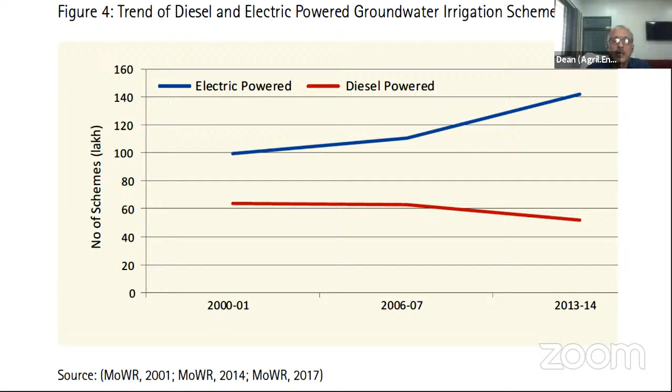Now, electricity. There are two sorts of power used in agriculture: electric pumps and diesel operated pumps. Over the past 2 decades, there's a drastic increase in electric power pumps over diesel power pumps. The reason is the deepening of the water table.

Roughly 15.6 million electricity pumps are being operated, 8 million diesel pumps, and 0.3 million from other sources. The electrification of pumps is being reflected here, and 21 million agriculture pumps are connected to the grid power, consuming roughly 18.5% to 20% of the energy.

5 lakh pumps are being added annually, and consumption has risen 54% since 2015.

Local irrigation systems are highly inefficient and unreliable, causing water wastage and consuming higher energy per unit delivery. Diesel consumption is roughly 200 million liters per year, causing $2 billion burden on the exchequer.

The growth of electricity, particularly in agriculture, is 25-fold. The demand has tremendously increased, which you can see reflected here.

In 2006, pending applications showed the demand growing every day for electricity pumps. In 2016-17, particularly in Gujarat, 1.61 lakh applications from 33 districts sought agricultural pump sets, out of which 1.32 lakh are pending.

Regarding electricity tariffs, the government is not even recovering 10 to 12% of the cost of supply, because electricity charged for urban areas is 6 rupees, but for agriculture it costs only 60 paisa per unit.

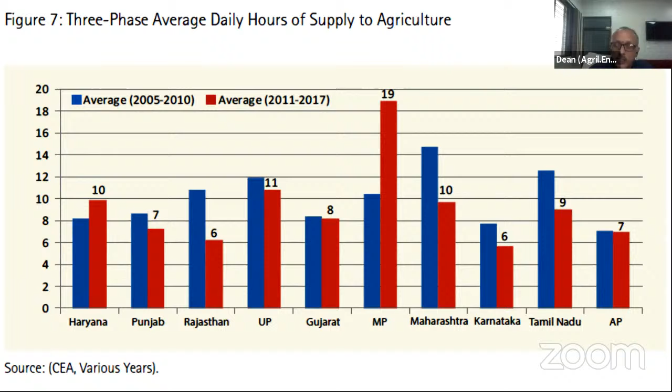Regarding three-phase supply, the assured Gujarat supply launched under Jyotigram in 2003 gives three-phase electricity of 8 hours. Otherwise, where Jyotigram is not available, we get less than 8 hours, even less than 6 hours. The availability of three-phase power across different states is reflected here.

The efficiency of the pumps is 40%, and the transmission losses are 25%. Cost of electricity is 60 paisa per unit. This is causing the water table to deepen very high, and overexploitation is causing too much deepening of the water table, particularly in North Gujarat as well as

the Kathiawad region. Because of this overexploitation, even the Central Groundwater Board has categorized Gujarat into 25 blocks, out of which 23 are overexploited in the state, with the worst affected being North Gujarat, where depletion is more than 100%, meaning extraction is more than the replenishment it is gathering. Against the national average extraction of 62%, Gujarat is using 72% of the extraction percentage.

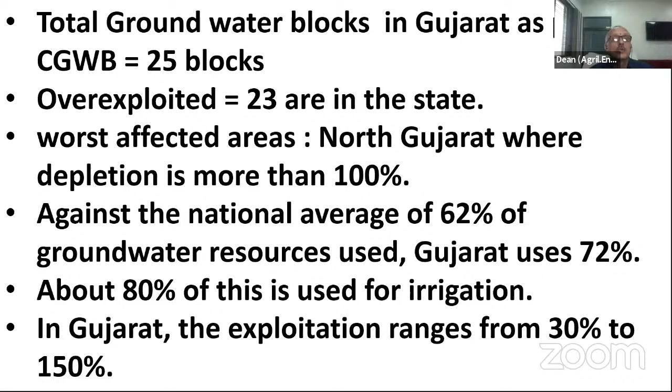Out of this, 80% is used for irrigation, and the exploitation ranges from 30% in South Gujarat to 150% in North Gujarat. This is causing too much scarcity, particularly in the groundwater blocks, and we are going to face an acute shortage by 2025. So the electricity-groundwater nexus needs to be analyzed, and rethinking is needed in this region.

On the energy sector side, totally 150 kilo cubic meters of groundwater is being extracted with electric pump sets, and 80 cubic kilometers of water is extracted from diesel pumps. The energy needed for 1,000 cubic meters to 1 meter height needs nearly 2.73 kilowatt hours of energy when friction losses are minimum and efficiency is at its peak.

For electric irrigation pumps, if you take efficiency at 40% and transmission losses at 25%, then for 1,000 cubic meters, roughly 9.1 kilowatt hours of energy is needed. That's the estimate the government is giving.

For 150 cubic meters of water through electricity, even if a 20 meter head is required, we are roughly consuming 27.3 billion kilowatt hours of energy. If you take a 40 meter head, it will be 55 billion kilowatt hours of energy needed. But in 2008, the Delhi Institute of Energy, in their raw data, estimated 87 billion kilowatt hours of energy, particularly for groundwater extraction.

But whether it's 40 meters or 20 meters, the value is too low, which is not reflected. That means there is a discrepancy. Either the water table must be deeper, or the transmission losses must be much higher, so the government is not reflecting it.

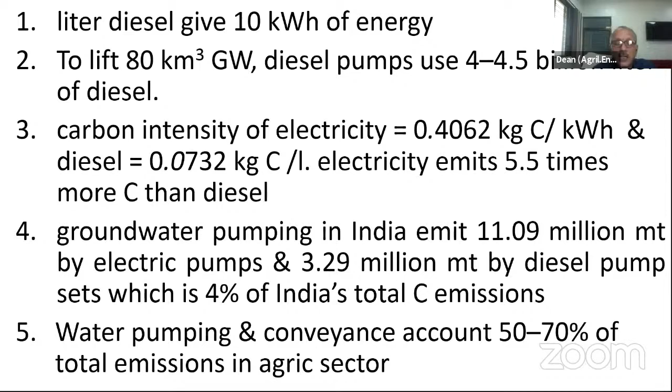Groundwater extraction is emitting roughly 11.09 million metric tons of carbon from electric pumps, and 3.29 million metric tons from diesel pumps, which means we are accruing roughly 4% of the total carbon emissions of the country. Even pumping and conveyance losses are causing 50 to 70% of the total emissions of the sector.

A second estimate suggests every meter decline of pumping water level will increase greenhouse gas emissions by 4.37 to 6%, meaning more carbon is emitted into the atmosphere. A 1% increase in diesel pumps reduces greenhouse gas emissions by 0.3%.

This is why diesel pumps cannot go beyond a certain level of the water table, and that's why we insist that where shallow water table conditions exist, diesel pumps are preferred. In eastern India, such as Bihar and UP, diesel pumps are more prevalent than in the western zone. Diesel consumption in agriculture is releasing 33.6 million tons of carbon equivalents into the atmosphere.

Now, regarding energy usage and demand, we have a population of 121 crores, out of which 83.3 crores live in rural areas and 37.7 crores in urban areas. The total installed capacity of the country was 370 gigawatts of energy produced as of April 2020, out of which thermal power constitutes 62.8% and hydropower constitutes 12.4%.

That means really 77% of total energy is catered from thermal as well as hydropower. And the 21 nuclear power plants established up to 2020 are producing 6780 million watts of energy. Per capita electricity consumption in India is 872.87 kilowatt hours during 2018-19, and peak power deficit in 2019 is 0.5%.

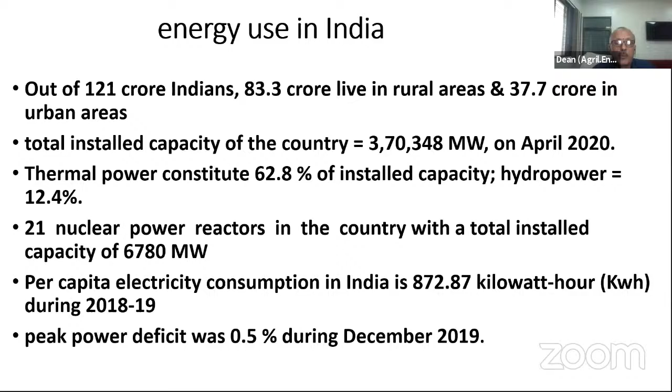Now let us see the Gujarat energy status in 2016 and 2018. Power demand is 18,221 megawatts. Energy requirement is 400 million units in 2018. Agriculture consumes 111 million units in poor rainfall conditions, or 60 to 70 million units in normal, good rainfall conditions. The government is purchasing 1500 to 2000 megawatts of energy from other states, and 1 lakh agriculture connections have been approved in the past 6 years.

So if you see, theoretical energy requirement is 0.34, but actual energy consumption is 0.98 kilowatt hours of energy per cubic meter of water, particularly in the Gujarat sector. Energy efficiency can be improved on two fronts: the power source and the appliances side.

Roughly 10 to 15% of energy efficiency can be increased by replacing existing undersized pumps with appropriate sized new ones, using low friction pipes, replacing high friction footvalves with low friction and low head footvalves, and through rectifications. These measures can save energy consumption by 440 kilowatt hours per year.

Now if you see it, existing pumps show a certain energy consumption in kilowatt hours per year compared to rectified pumps, substandard new pumps, and efficient new pumps. The electricity consumption over the year is reflected here. That's why we should go for efficient new pumps where low energy consumption is achieved.

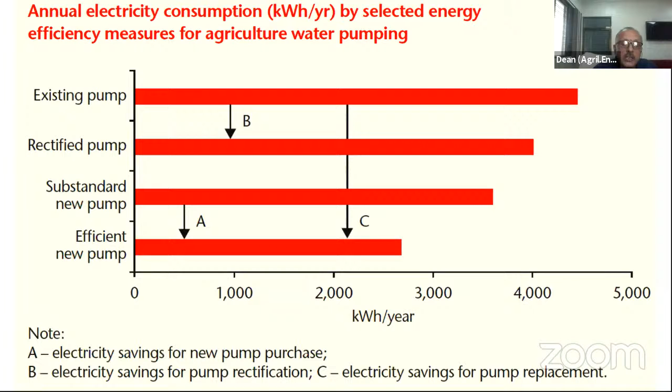In addition to that, if you provide renewable energy, it is going to save much more, and it's going to add another dimension to it.

Now on the agriculture pump side, if you see it, agriculture pumps should be replaced with smart pumps having a processing SIM card as well as smart meter systems. These smart metering systems can save 20 to 30% of the energy from pumping systems, and they can monitor consumption in real time.

Energy Efficiency Services Limited distributes Bureau of Energy Efficiency standard pumps. 2 lakh star-rated pumps are supposed to be given in Gujarat, and they need 54,000 crores for this program from the government.

30% of energy savings by 2019 is the target they have kept. This translates to annual savings of 20,000 crores on agriculture subsidies, or saving 50 billion units of energy per year because of these smart energy pumps.

Now if you see the rising demand, total demand is 183.8 gigawatts of energy, and expected peak demand in 2021-22 is 295 gigawatts. Because of the high standard of living, by 2035-36 we need 690 gigawatts of energy, particularly in India. That means the rising demand is there.

This is on the demand side. We need additional power of 450 gigawatts of energy by 2034. A 7% growth in energy supply is required if India grows at an 8% growth rate, and electricity will be the key input in the GDP growth of agriculture.

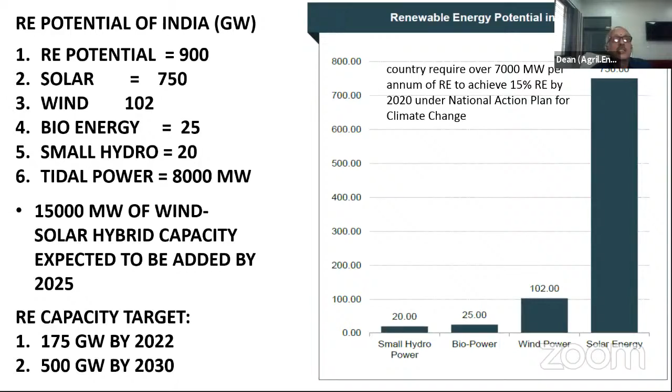Now, the rooftop system we are already adopting, and that will reduce 70 tons of carbon annually, and 78,000 kilowatt hours of energy can be saved.

And India, particularly in the solar energy sector, is going to replace 26 million groundwater pumps with solar pumps in the first phase. They are going to even replace, where access is not available, 2 lakh pumps connected with pipeline systems, which needs $1.6 billion in the next 5 years. Deployment of 20,000 solar pumps is planned in selected rural areas with access to pipe water.

This replacement of 5 million diesel pumps with solar can save 18.7 gigawatts of installed capacity and 23.4 billion megawatts of consumed grid electricity produced from 10 billion liters, resulting in carbon emission reduction by 26 million tons per year. Now, particularly wind power, the country is ranking 4th in installed capacity.

India is going to attain 227 gigawatts of renewable energy by 2022, against the target of 175 gigawatts in the Paris Agreement. They wanted to achieve 500 gigawatts by 2030, and solar installation increased by 360% by 2021.

As a percentage of renewable energy, it comprises roughly 49% of contribution towards power generation, increased from 12.92 in 2013-14 to 23.51 in March 2020. We are going to replace coal plants with renewable energy sources, saving 54,000 crores annually, and 5,000 compressed biogas plants will be set up across India by 2023.

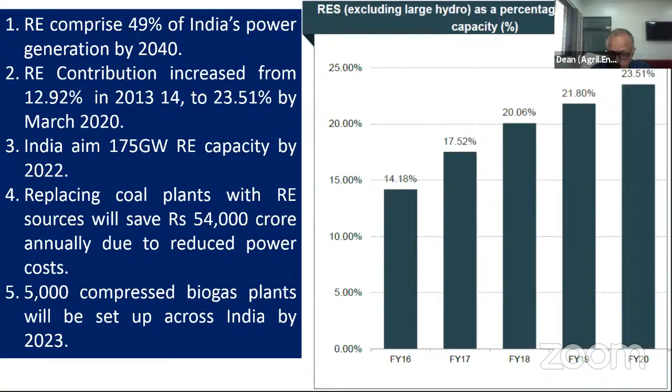That's the generation side. Now, installed renewable energy capacity growth rate is 17.33% from 2016 to 2021. Now, this is solar pumping coupled with irrigation systems.

The Surya Shakti Kisan Yojana, launched for doubling farmers' income, provides 12 hours of assured power supply during daytime for irrigation, covering 12,400 farmers from 13 districts of Gujarat, with a total project cost of 870 crores.

If you see, solar is really outperforming in India. Even wind power is reaching 114 gigawatts by 2022. In October 2019, India started a solar power plant in Rajasthan with a capacity of 2,225 megawatts of energy.

In June, Adani Green Energy got an 8 gigawatt solar energy project worth 45,000 crores. The Prime Minister has already inaugurated a 750 million watt solar power project in Rewa, MP. 47 solar parks with 25 gigawatts of capacity are going to be approved in India till March 2020.

The cost of producing solar power is 14% less than the cost of electricity generated from coal. Even on sprayers, we are using solar power, and with battery backup, the cost comes to only 25,000 rupees. A 30-liter tank can cover an area of 25 by 25 square meters with an application rate of 84 liters per hour.

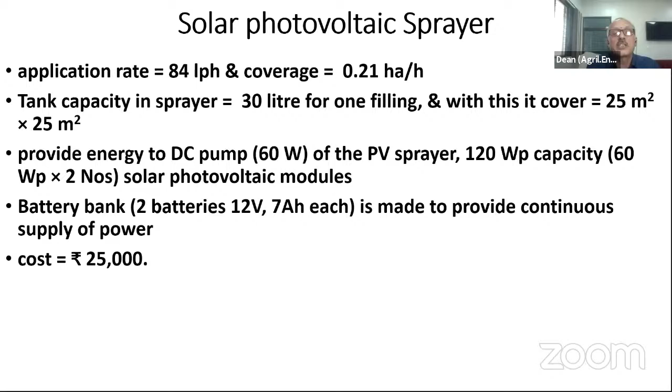Even dusters, which are being used with a field capacity of 0.075 hectares per hour, cost 9,000 rupees. Even solar dryers can save energy, particularly 290 to 300 kilowatt hours of energy per square meter area, with annual benefits of 6,000 rupees.

You can get return on investment within the payback period; the internal rate of return is 2 years. The drying time is half of solar sun drying, and it can reduce 1,127 kg of carbon created into the atmosphere per year. Your solar dried vegetables have much more affinity in the international market.

Some solar dryers and tunnel dryers are examples. And importantly, solar power tractors are coming. The cost of the solar power tractor is 2,35,000 per unit, with 1.5 kilowatt hours of energy and a 20 horsepower engine. In Rajkot, nearly 8 acres of land is already acquired, and they are going to produce these by 2019-20.

Saribhai Patel is there, and he is going to generate these solar power tractors, particularly in the market.

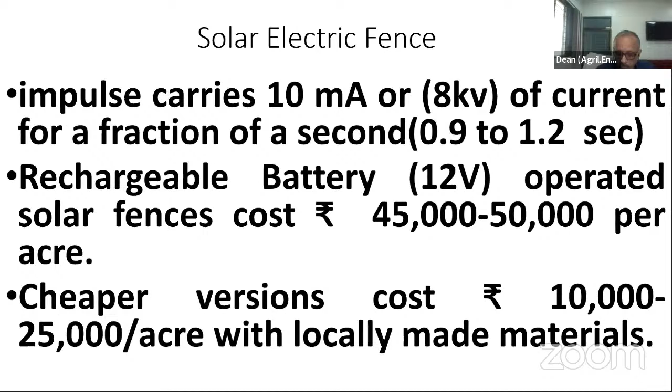Then solar electric fencing, which costs 45,000 to 50,000 per acre, gives electricity in pulses of 10 milliamperes for 0.9 to 1.2 seconds, which is sufficient. Even cheaper versions are available at 10,000 to 25,000 per acre with locally made available materials.

And you can get solar milking machines at a cost of 70,000, which are mobile machines. Even the Karnataka government is giving a subsidy of 50%.

Even Gujarat government is thinking on the same lines to extend the subsidy, particularly for milking machines with solar power operated systems. You can couple these mechanical machines with solar power, as mechanical systems already exist.

Wind energy installed in India is 37,744 megawatts up to March 2020, accounting for 23.5% of installed power capacity and 43.4% of renewable energy capacity. Out of the 175 gigawatts RE target, 60 gigawatts are to come from wind by 2022. Wind energy potential at 50-meter hub height is 49 gigawatts, at 80 meters 102 gigawatts, at 100 meters 302 gigawatts, and at 120 meters 695 gigawatts.

The cost of wind power comes to 3 rupees per kilowatt hour, lesser than coal. These are some wind potentials at 100-meter height, accumulating to 302 gigawatts particularly in India. Cumulative wind power installations keep increasing while cost keeps decreasing. The sector's contribution is about 10%, and about 2 million jobs are going to be created in the next decade for wind energy.

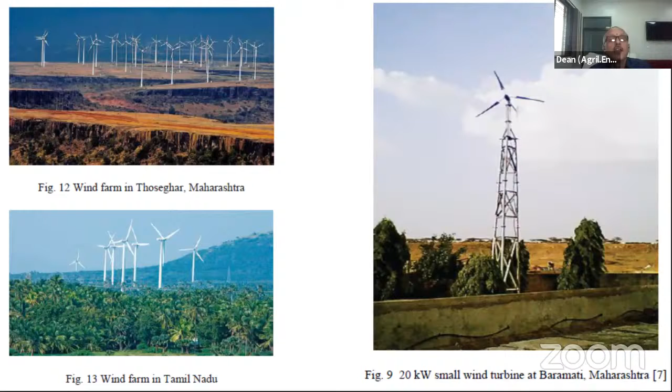Government of India launched the Fifth Wind Resource Assessment Program in 1985, and installed 50-meter towers, monitoring wind speed at 10, 20, 30, 40, up to 50 meters continuously from 1985. Totally 794 wind monitoring stations were established up to 2014.

Some wind farms exist particularly in Gujarat, where we have 1600 kilometers of area on the onshore, so a lot of potential exists. That's why Gujarat government has already initiated and installed 12 wind farms, particularly onshore.

Targets and reforms being taken: 22 gigawatts under implementation, 5 million jobs to be created in the next 20 years. Gujarat government is also taking up Land Reforms Act and evacuation policy for the government. They want to reduce carbon emissions by 15% from the renewable sector by 2020.

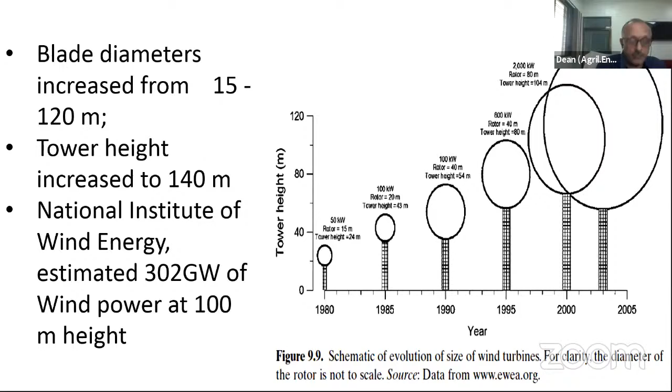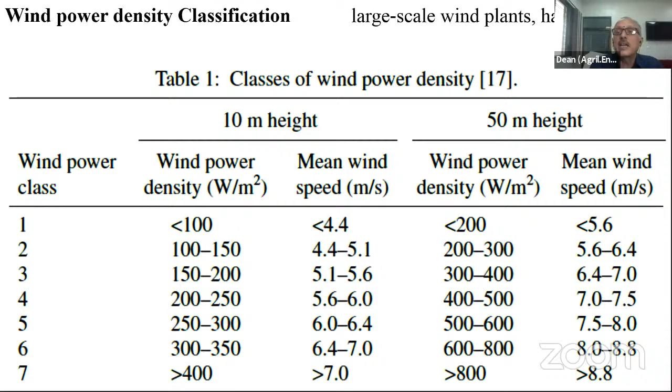Now if you see the wind power density classification, we have 7 classes at 10 meter height, 50 meter height, and up to 100 meter height - 10, 50, 80, 100, and 120. These are some of the heights which we give particularly for the wind power classes. If you consider large scale wind plants, they should have a rating of more than 4.

What should be the minimum wind speed required for optimum area? That is 3.6 meters per second. Economically viable speed is 5 meters per second. Acceptable is 10 meters per second. Optimum speed is 15 meters per second. But the output power is directly proportional to the cube of the wind speed, so you need to limit the output power in high wind conditions to prevent mechanical damage.

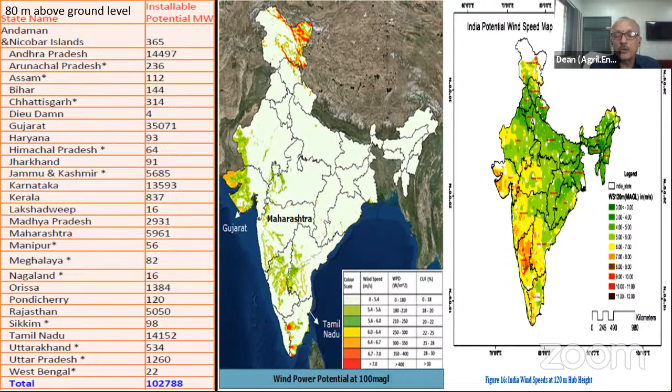This is the installable wind potential at 50-meter height. This is at 80 meter, 100 meter, and 120 meter heights above ground level, particularly showing the potential of wind.

Now for wind energy, you have horizontal axis and vertical axis wind turbines. Then the main components are the transformer, the tower, the gearbox, the rotor blades, nacelle, hub, and yaw mechanisms. These are some of the important components which are to be taken care of.

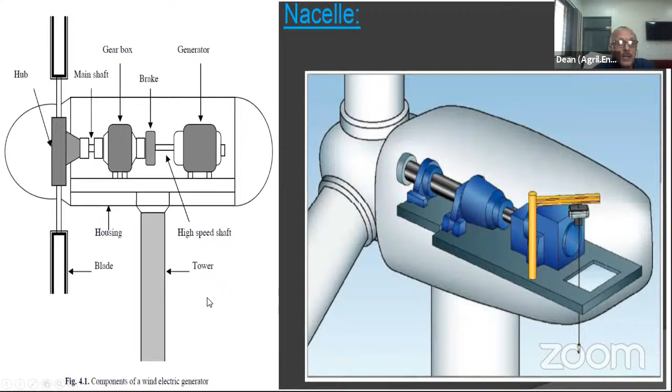If you see the nacelle design shown here, the nacelle counterbalances the rotor, the hub, as well as the wings, and contains the main shaft, gearbox, brakes, and generator systems. The yaw mechanism is considered here, particularly for keeping the rotor towards the wind direction.

These are the main components: foundations, towers, blades, hub, nacelle, generator, gearbox, and controllers. Particularly the foundations depend on the turbine size, weather conditions, type of soil, and terrain topography.

In normal conditions, a 50 feet by 50 feet by 30 feet deep block foundation is provided. The tower is kept in that, with long bolts given to the bottom of the foot. This is the foundation which is given for the windmills, and these long bolts at the bottom of the foundation will be tightened. These bolts are covered with a plastic cover to prevent corrosion.

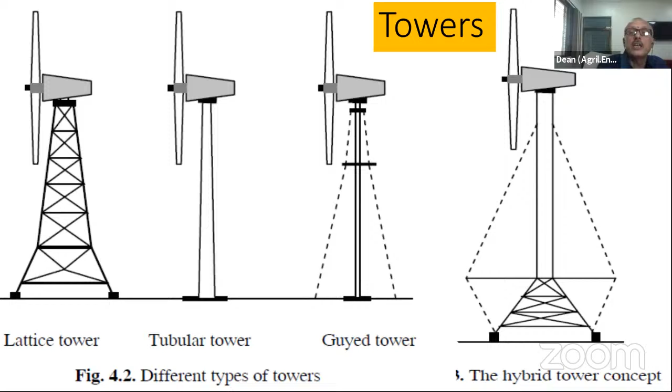Now for towers, you have different types: lattice towers, tubular towers, guyed towers, and hybrid tower concepts also exist, but we mostly go for tubular towers. Lattice towers are used for overhead electrical transmission lines - they are metallic bars bolted and welded together.

Tubular towers come in shorter segments that are bolted together, making them easy for transportation and manufacturing. Tower diameter ranges from 10 to 14 feet, and they are always tapered in sections, with a bigger diameter at the bottom and a lower diameter at the top.

These are the hubs, where the blades are fitted, attached to the gearboxes with a low speed shaft, which is again connected to the high speed shaft through the gearbox. The hub and blades rotate together when the turbine works.

The nacelle consists of this complete part, which takes care of the low speed shaft, gearbox, high speed shaft, as well as the brake assembly. It adjusts the turbine orientation to the wind direction, and it counterweights the balance for the hub and blades.

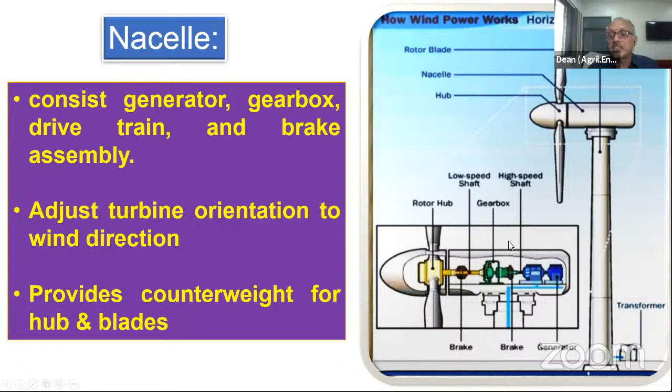In the gearbox, the rotation of the low speed shaft is 20 to 50 RPM, and the second shaft after the gearbox is 1000 to 3000 RPM. So the gearbox is increasing the speed ratio to about 1:75.

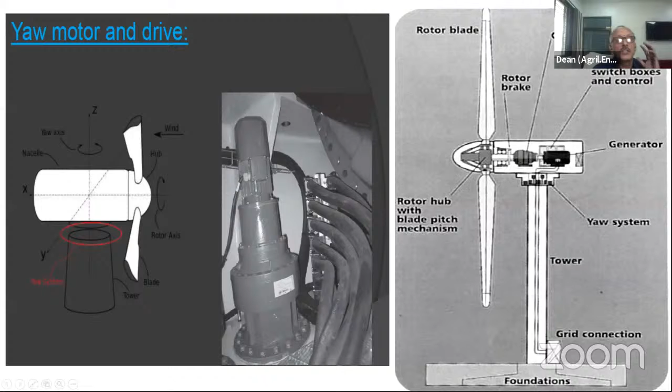In classification, there are micro turbines, small scale turbines, and large scale turbines, where output power ranges from 10 watts to greater than 1000 kilowatts. For low purpose and small scale operations, micro is used. For household purposes and small battery charging, small scale is used, and where large power wind generation is needed, you can use large scale wind turbines.

For large scale turbines, the tower height ranges from 70 to 100, even 120 meters, while for small scale turbines, the tower height ranges from 1.5 meters to 20 meters.

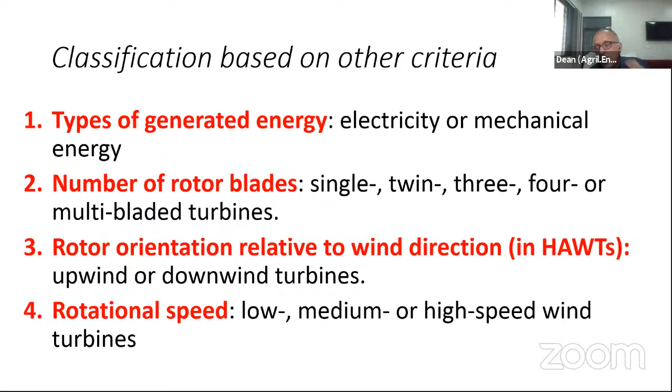Based on criteria, classification can be either for electricity generation or for mechanical energy for pumping irrigation water, based on the generator. Also based on number of rotor blades - single, twin, 3, 4 blades; based on orientation relative to wind direction - upwind and downwind turbines; based on rotational speed - low, medium, and high speed turbines; and based on axis of rotation - horizontal and vertical.

Horizontal axis turbines have minimum drag losses, higher efficiency and power coefficients, but have a complex and expensive design procedure, and emit noise due to rotational speed. They need a cylindrical furling system to protect turbines from strong winds, particularly in onshore turbines, and need a yaw mechanism to orient the turbine towards the wind.

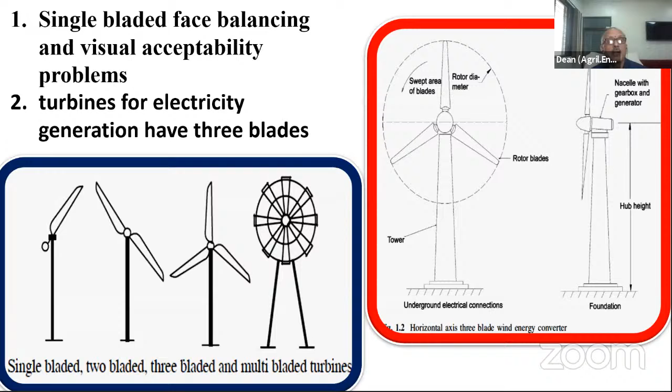Turbines can be classified as horizontal and vertical axis. There are single blade systems and multi-blade systems, and for electricity generation you need 3 blades. These are the types of blades for horizontal axis and different sorts of vertical axis turbines.

For vertical axis turbines, the generator and gearbox can be placed on the ground, so no tower is needed, and a yaw mechanism is not needed either.

But wind speed at ground level is very low, so power output will be low, particularly for vertical axis wind systems, and rotor efficiency as well as output power is also low. It needs some self-starting mechanism to initiate whenever it gets stuck, and guy wires are needed to support the structure.

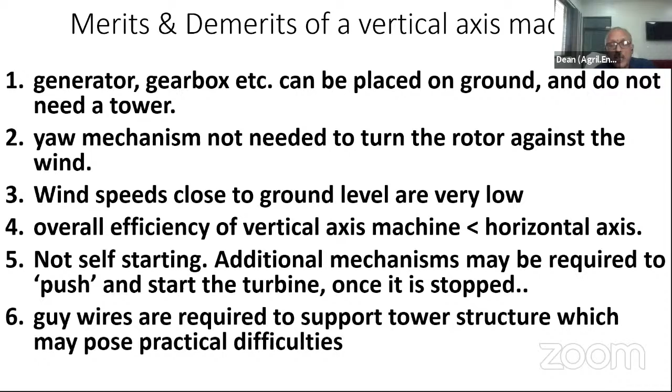An important thing in the design is wind shear. Our monitoring is generally done at 10 meter height, but if you want data at a height of 120 meters, you have to extrapolate the wind speed to that height - that's called wind shear. That means the wind speed variation with respect to height, which changes in an exponential manner.

Wind shear is the velocity increase with height, but this depends on the roughness of the terrain. If you have dense vegetation, the variation is low, while level and smooth terrains generally don't have much effect on wind speed. This terrain surface roughness is generally represented by roughness class and roughness height.

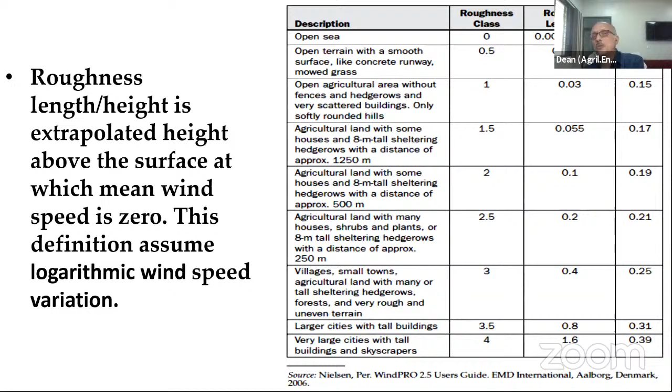If you see height versus velocity, there's exponential variation, and another school of thought gives logarithmic variation with a different slope. The roughness length and height means the height at which the effect is zero - that's the roughness length. The roughness class, roughness length, and shear coefficients for wind shear can be calculated based on the description, or if you don't want to use the table, various formulas exist which I will show you later.

Now, how to find out a particular wind velocity? If you have some reference velocity at a height, and want to find the velocity at another height, this matters because ultimately the power is proportional to the cubic power of the speed.

That's why you have to find out the power at 100 meter or 120 meter. This alpha is called Hellman's exponent. This is at what height you are needing it, and this is the reference height at which you are measuring your wind speed.

The alpha value generally, if you don't have any value, we can roughly assume 0.14 or 1/7 if it is a stable atmosphere with consistent wind conditions. But it depends generally on terrain and atmospheric conditions. IEC has given, in 2007, for various areas the alpha value, Hellman's exponent. If you want approximations, the rough value is 1/7.

This you can extrapolate when wind speed conditions are needed, measuring only at one height. It underestimates when stable laminar flow conditions exist, and overestimates when mixing and convection are present in the wind speed. For approximation, if you want to extrapolate from one reference height to another, if the H2/H1 ratio satisfies this condition, only then can the approximation of a fixed value be taken.

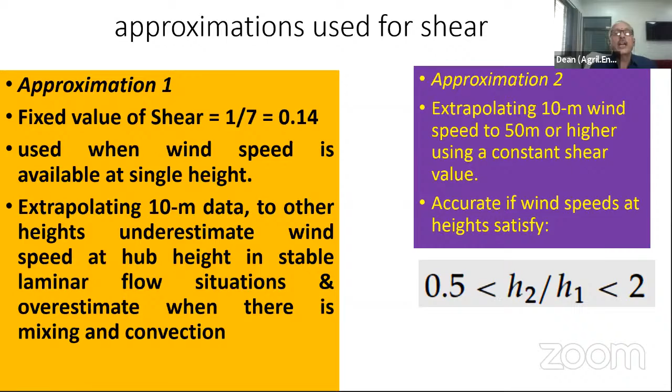If you don't want fixed values, lot of formulas exist based on surface roughness, velocity height, and reference height, developed in '78, '75. Nearly 10 formulas were given by Spera in 1994. I have not given those, but the two important, latest formulas I have given to you.

One is the power law profile for wind shear, and the other is the logarithmic profile variation, where at any reference height, this is your base height, velocity at which you want to measure, and the reference velocity if known, accordingly depending on surface roughness length, here z0 is the surface roughness length.

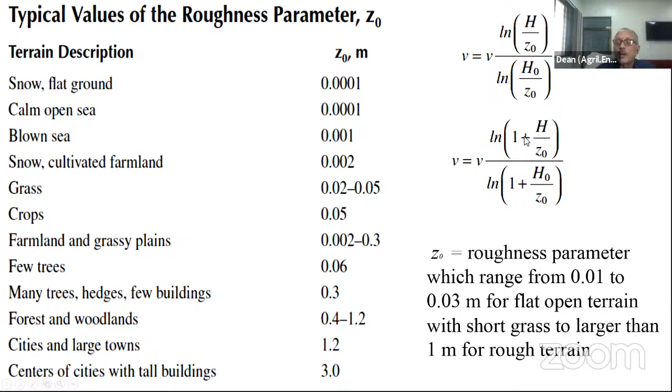At 100-meter height, your reference height, the speed is 9 meters per second. Based on that, the logarithmic law can be used to find the wind speed velocity at any height. This is what Hellman's exponent is. Another value, this is another formula particularly used for wind shear. They are all either logarithmic or power law, and these are the roughness lengths.

Dr. Sarwan? Dr. Sarwan, can you hear me? Dr. Sarwan, you may ask, sir, there is some technical problem. Hello? Sir, Dr. Dharmendra, yeah, please ask them. There was some technical issue. I think some internet connectivity problem. Please ask them. Sir, you can write one line in this chat box also. Okay.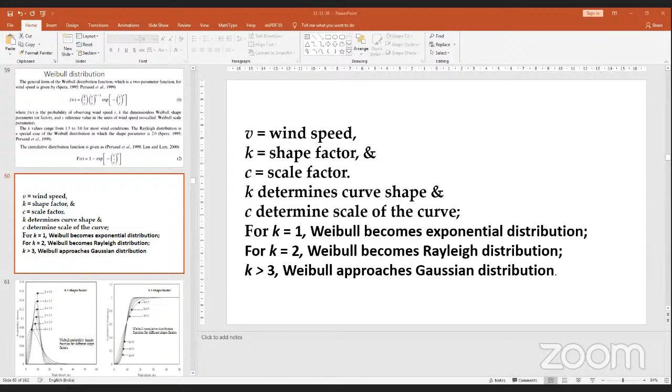Hello. Hello. Subbaiah sahab has joined. Okay. Hello, Subbaiah sahab. Hello. Okay, is it visible? We can hear you, sir. Okay, no problem.

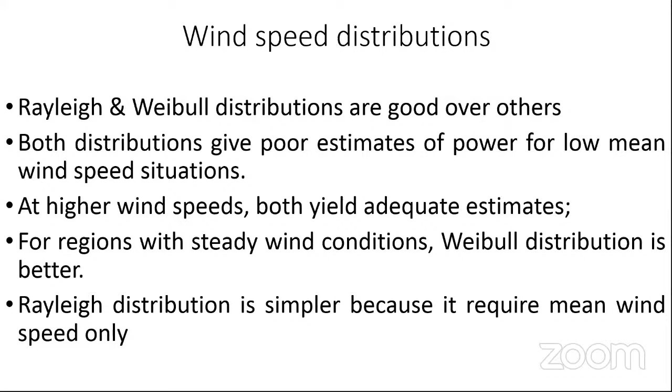Now a very important aspect, particularly in this, what is the probability of the wind to get a particular optimum level, that needs to be analyzed. That is a very important issue, particularly in wind speed distributions. We have Rayleigh's distribution as well as Weibull distributions. Both give very good estimates when wind conditions are steady and better, but at low speed wind conditions, both give poor estimates. Rayleigh's distribution is just a particular case of wind speed distribution when the shape factor is 2.

Now, if you see the probability density function, particularly for Weibull distribution, this is the probability density function, and this is your cumulative density function, where K and C are the shape and scale, that means location parameters. K is the shape factor, C is the scale factor, and if you wanted location parameter also, there is a 3-variable distribution you can take.

But for K equal to 1, Weibull becomes exponential. If you put K equal to 2, Weibull becomes Rayleigh's distribution. And if K is greater than 3, then Weibull approaches Gaussian distribution.

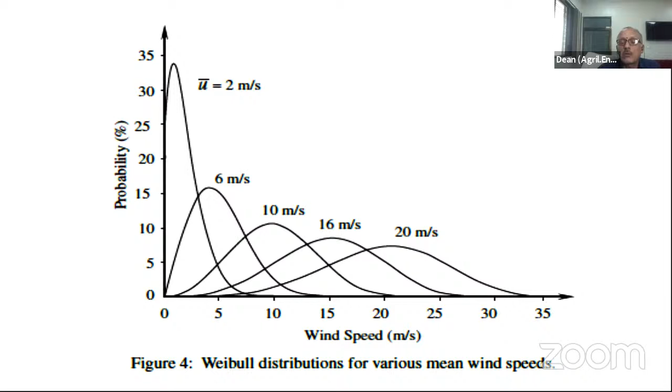For various values of K, the probability density function is shown here, and the cumulative density function is predicted on the right-hand side. Now, for various speeds, you can see how the Weibull distribution curve changes, as shown here.

Now, these are some of the properties: mean, median, mode, variation of the Weibull distribution. This is the 2-parameter Weibull distribution, and now you have K and C, which are shape and scale parameters.

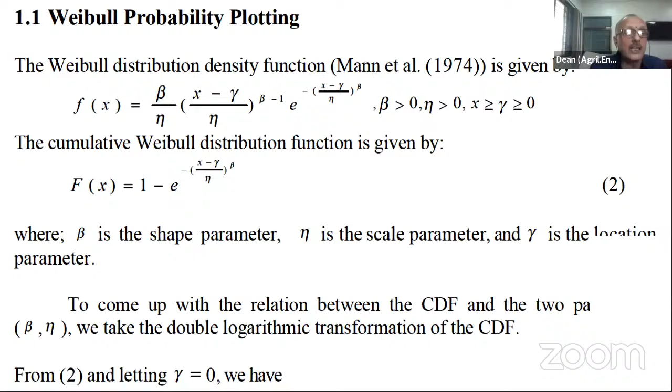How do you estimate this? You have particularly two ways of approach: one is graphical methods and another is analytical methods. Now, even in graphical methods, you have two approaches. One is Weibull probability plotting position, and another is where you just plot in a Weibull probability paper using double log, and accordingly the slope as well as the intercept can be taken as the scale and shape parameters of the distribution.

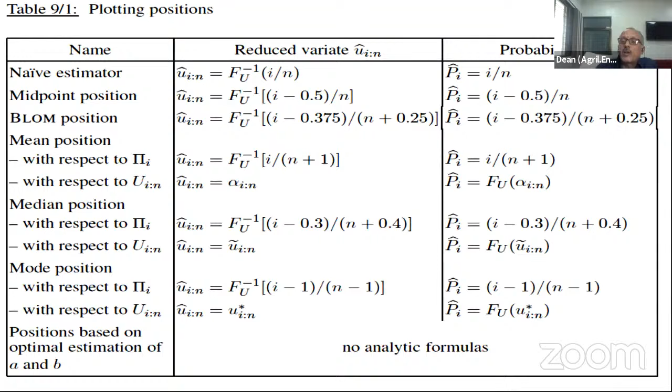Now, the second thing is hazard plotting position. The hazard function is defined as the probability density function divided by 1 minus the cumulative density function. So accordingly, the probability function is defined, and the hazard function is defined, and the plotting can be done based on each failure. This is the procedure which is given, and we can easily find out using the hazard plotting technique.

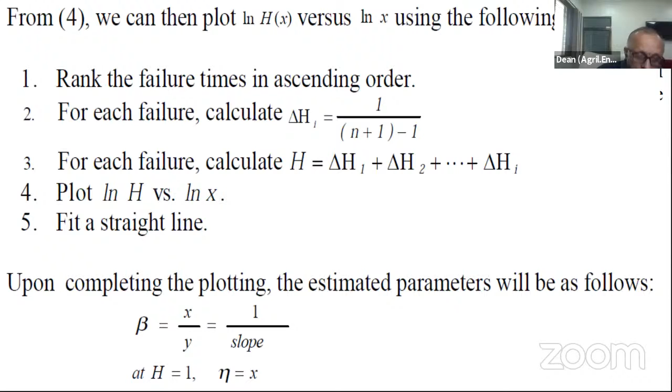One is graphical plotting and another is hazard plotting. And if you want, the hazard plots can be given even in SPSS and other software, which give the plotting positions for this.

Now, for analytical methods, you have the standard deviation method, method of moments, least square method, maximum likelihood method, and various others—even the principle of maximum entropy, method of mixed moments, as well as L-moments. All of these exist. I am not going into detail on all of this; I'll just show you the prevalent methods that wind generation people are using.

This is the standard deviation formula, the standard deviation method used for finding K and C in the probability density function. This is your standard deviation, this is your mean of the observations, where the gamma function is used. This is your K, the shape parameter, and this is the gamma density function. Based on this, you can find the K value, and this K value can be substituted.

All Weibull parameter estimation procedures, if you see, are completely implicit—they are not explicit functions. But if you want a C value based on your average mean speed as well as the K value in the probability density function, you can find it. And the rough approximation for K can be taken as sigma V by Vm.

That means Cv to the power minus 1.086. And the procedures for Cv and your V are all given alongside this.

Now, the second is the standard deviation method, where C is given, and another approximation for C is shown here. This is the maximum likelihood estimator—this is also an implicit equation, and you need numerical analysis, particularly the Newton-Raphson method, for estimating these maximum likelihood estimators.

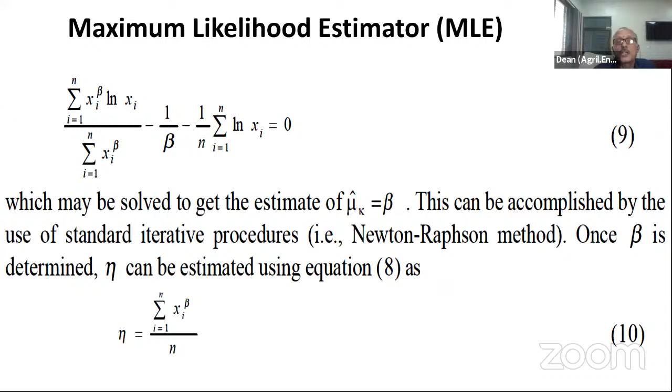Now, the Weibull parameters for maximum likelihood—sometimes people give the data in intervals. So based on the frequency intervals, if the data is given that way, you can accordingly use this method of maximum likelihood estimator for frequency values. This is the least square method.

Least square method is also nothing but plotting on an ordinary graph on the log and estimating based on that. Here you need to have y bar, x bar, and this beta, and these are nothing but beta and eta, which are nothing but K and C, scale and shape parameters.

That's all. Now, if you want simple approximation methods, there is the energy pattern method, pattern factor method developed by wind energy engineers. Particularly, they have developed the energy pattern factor for this. Now, if you see it, this is why they are using this cubic power average.

Now, if you calculate average wind speed and you calculate average power, for a particular wind speed, you have taken one particular power, V1, another speed V2 is given, but the power is given P2, and now you make it average V1, V2 up to Vn values. The average which you are getting and the average of the power, they never match.

That's why it is called root mean cube speed, as they have mentioned it. Now, what they want is you make the cubic power of it, and the cubic root of it is to be taken for the average value. If you take that, then the average power as well as average wind speed will be matching. So that's why the energy pattern factor method is given as the cubic power average of the cubic power and the average of the normal cubic of the normal average.

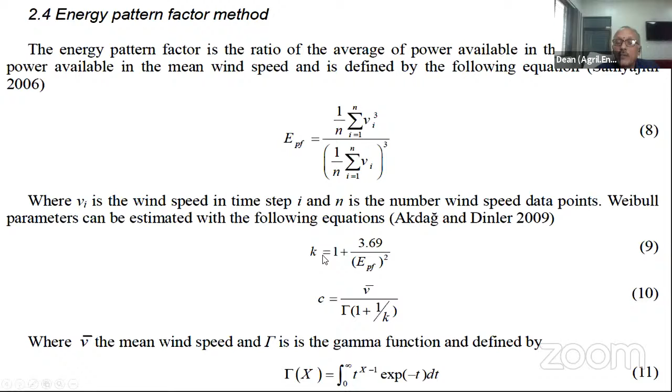The ratio of these two is taken as the energy pattern factor, and based on that, the K value is determined, and based on that, the C value can be determined. Now, these are some of the approximations, but instead of using approximation methods, you can use L-moments.

L-moments were defined particularly in 1985, by IBM people, and you can use that. That is a very simple approach. You can use probability weighted moments even, for estimating the parameters.

And it is not necessary that Weibull 2-parameter distribution is only to be used. You can use any sort of distribution provided the chi-square test, KS test, as well as Anderson-Darling test are satisfying. If they are satisfying, you can use any sort of distribution, not necessarily. But wind generation engineers say Weibull 2-parameter as well as Rayleigh distribution give good performance.

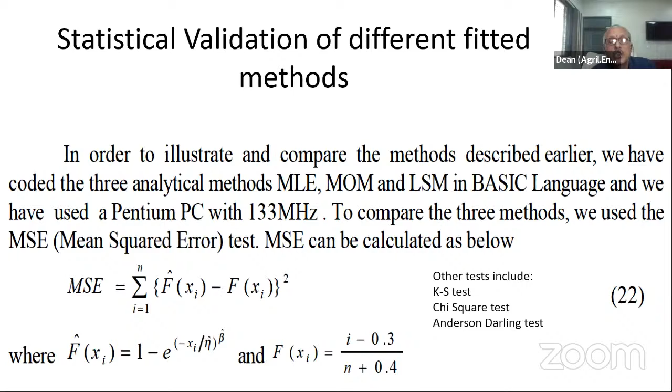This is what the statistical validation after fitting the distributions looks like. This is some of the methods which we are showing. Based on that, if a particular distribution is fitted, then you can say what is the value.

If the speed is from 4 to 25, what will be the power I am going to get? You can find it out through the Weibull probability distribution. And if you ask what is the probability of getting more than 16 meters per second, based on that I should make my design, then also you can calculate it here.

So between 4 to 25, what is the probability? Greater than 24 meters per second, or greater than 35 meters per second, what will be the probability? You can estimate it accordingly.

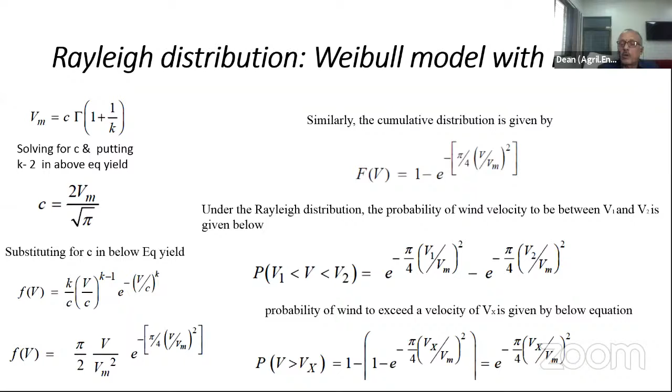And Rayleigh's distribution is just a modified way where K is put equal to 2. If you put that value in, based on that you can determine your probability density function, cumulative density function. And based on that, you can find out what will be the power output based on Rayleigh's distribution between two particular values, and above a certain value, how much is the value, you can find it out.

Now, if you know the probability density function parameters K and C for Weibull or Rayleigh, you can determine what will be the power, that means rho A V cube into Cp. That is the actual power equation that is being used.

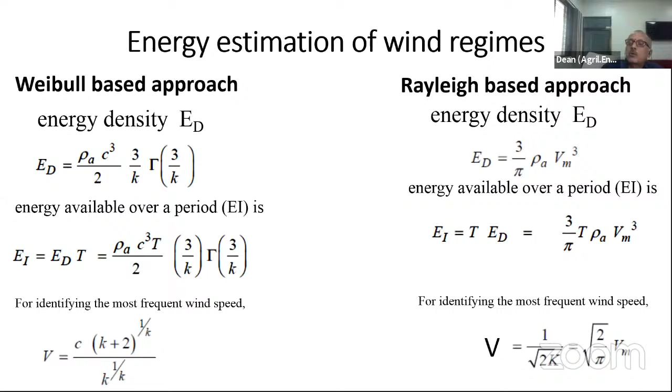If you don't want that equation to be used, but if you wanted to find out based on the scale and shape parameters, you can find it out even based on the Weibull as well as Rayleigh distribution.

Now, if you see it, this is what I am saying, root mean cube speed, which is defined in the energy pattern factor methods, which is V average, how it is to be taken, the root mean cube speed. That's because if you want the average speed determined and the average power determined, if you wanted to match these two, then and then only they can be used.

Based on that, you can find out density at any value with temperature variations, even elevation above your ground level, and rho 0 is 1.225, you have to keep it.

Second thing, how rotor diameter is to be adjusted. Rotor diameter means the available power from the wind, and if this is only for pumping, I am concentrating particularly for pumping. But if wind generation is there, then accordingly for electricity generation you have to take care of the efficiency of the rotor, efficiency of the pump, that means generator, your electricity, everything, all those efficiencies are to be taken, and accordingly the rotor value is to be decided.

Particularly, this is the hydraulic power, this is the wind power, matching this one, and if you say 5-meter rotor diameter is taken, accordingly you can work it out.

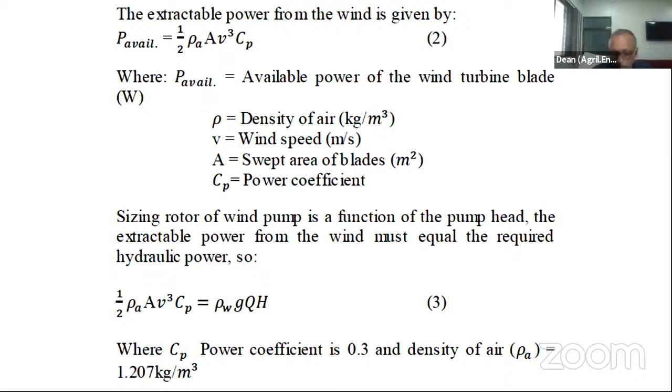You equate these two, put rho W as 1000, and 1.207 value. Generally for Indian conditions, we can take 1.29. If you put those values, you can find out rotor diameter, and particularly for wind generation in your horizontal axis, you can take pi by 4 into d square, so d is your rotor diameter accordingly.

The important second factor is CF, that is called capacity factor, which is to be taken. Capacity factor means what is the total. Suppose your windmill is operating, and maintenance hours are 200. In a year you have 8,760 hours. So if 200 hours of maintenance is removed, the percentage of hours you are getting is 97.71%.

Now for capacity factor, take a 2 megawatt per hour windmill. Total power to be generated in a year is 17,520 megawatts, but actual power produced is 4,000. That means 4,000 divided by the total power will give you 22.83%.

That is the way to calculate your capacity factor. If you don't have any capacity factor or output data, you can take rough values from the European Association, which has given figures for various coastal, onshore and offshore areas.

The very important second thing is tip speed, which decides the number of blades as well as your capacity factor. Your CP can be calculated, your CF can be calculated based on this. It is nothing but the wind speed at the tip to the wind speed available at the hub, or downstream to upstream.

This can be calculated by 2 pi n r by v, where n is the rotational speed, r is the radius of rotor, giving your angular velocity. If you don't have any values, you can presume 1 to 4, and for fast runners, 5 to 7 tip speed ratios can be taken.

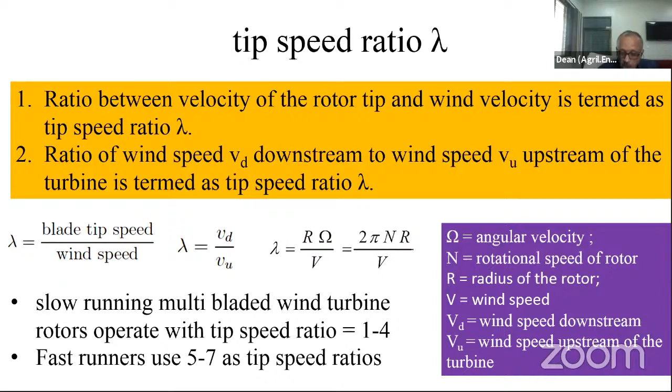Now, how to calculate CP? This is where you have taken your CF. CP is another important parameter which Betz has defined, but recently in 2008, one equation is given based on tip speed ratio. That CP, which is called the Betz limit, can be calculated as 1 plus lambda into 1 minus lambda squared, by 2.

Now, if you want the optimal value, you can differentiate using calculus of variations, dCp by d lambda, and equate it to 0 to find out the value of lambda. If you find out based on that calculus of variation, the lambda value will come to 1/3. So that optimum value, if you keep it here for CP, you can roughly get 16 by 27 CP.

That means the maximum power that can be extracted is 16 by 27. That's what Betz has given. Albert Betz, who was a German physicist, in 1919, that's called the Betz limit. He gave this based on some theory, but really with tip speed it was modified and accordingly it was shown. He said that 59.3% of the actual energy cannot be converted more than that. That's why he limited that coefficient.

And if you see it, even based on this, that's what I am saying, the ratio of output power to the power available is defined such that, if you know the tip speed, based on that tip speed, you calculate your CP.

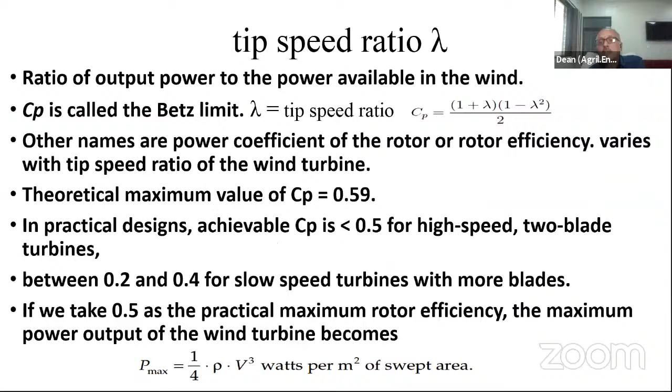Based on that, you can calculate the total number of blades that can be taken for a particular pumping system. Theoretical maximum value is 0.59, given as the Betz limit. But in practical design, it's always less than 0.5 for high speed 2-blade rotors, and 0.2 to 0.4 for slow speed wind turbines with more blades. But if you take exactly 0.5, the power output can be 0.25 into rho into V cube per swept area.

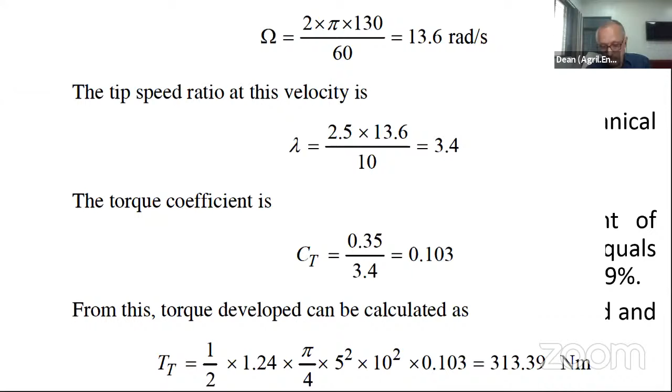Now, there is a difference between windmill efficiency and CP. Windmill efficiency is the efficiency of converting wind energy to mechanical energy. But if you take mechanical efficiency also into account, then overall efficiency will come. Roughly you can say 50% of the Betz limit can be taken as your efficiency, meaning 18 to 19%, or 18 to 20%, is the maximum value available for overall efficiency of windmill systems. If you don't have any value, you can take 18%.

Now, this is what we have given you - 35. Now for wind pumping, this is the case of horizontal rotor systems and vertical rotor systems. This is your vertical, this is your horizontal rotor systems, and how the pumping systems can be taken.

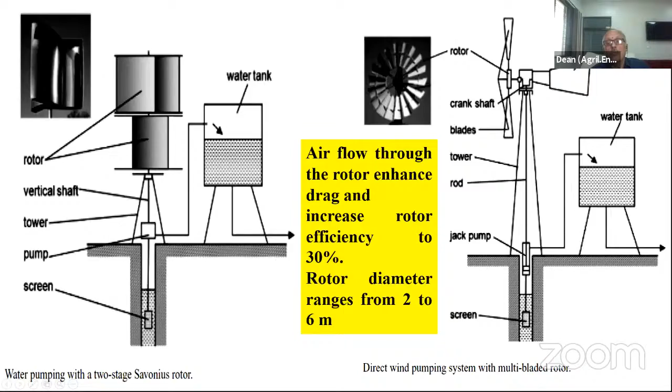Now, what is the daily volume that is available? If you know the head, based on the speed, you can design how much it is - if a particular head is there, for a particular wind speed, you can find out what will be the daily volume available for irrigation. This is a simple way of giving it for a particular wind yield.

Now, pumping conditions are there - you need drinking water supply, livestock watering, irrigation, drainage. For how much flow rate is needed, and for what much height. If you want drinking water, it's a low flow rate with a high head. For livestock, you can go for low to medium flow rates with medium heads. For irrigation, you have to go for medium or high flow rate. And for drainage applications, you need a high flow rate with low head combinations.

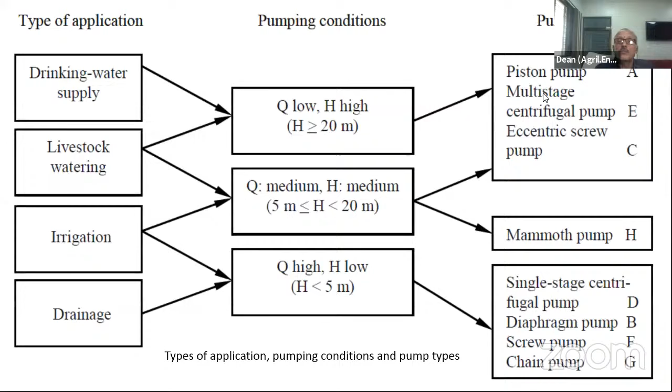Now, what is the type of pumps for low Q high head, medium Q medium head, high Q low head? What types of pumps are to be used with the windmill - that is shown here. Certain windmill operators have given their broad specifications, output versus head, and suitability for different types of windmills, as shown here.

Now, how to synchronize this - how to make irrigation planning particularly for windmill systems. You have to do the irrigation planning based on wind speed, find out hourly discharges available, then accumulate for 24 hours a day. Either you consider overall efficiency as a fixed value or calculate based on Q - you can make whichever choice is opted.

Calculate potential evapotranspiration per day, decide the irrigation frequency, and based on that, volume of demand can be estimated. Here is a case where a recurrence interval is given on one side, and estimated discharge for 24 hours wind speed is given.

Now for giving irrigation, you can find out the area based on the auxiliary storage reservoir system. How to find out the area? What should be the size of the auxiliary reservoir system? I'll explain you right now.

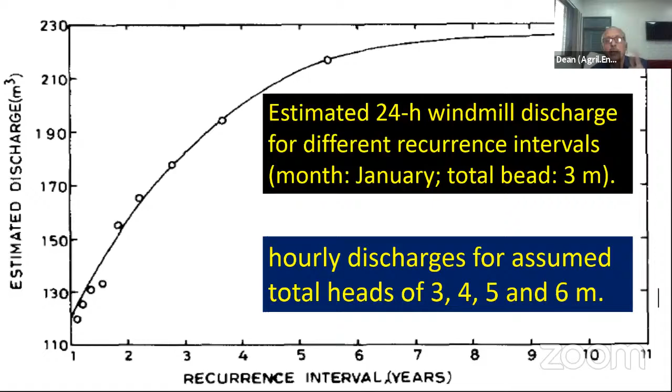And if you put those values, you can get this. The ratio of these two is nothing but the efficiency of the system. Or if you want efficiency to be a variable, you can find out Q.

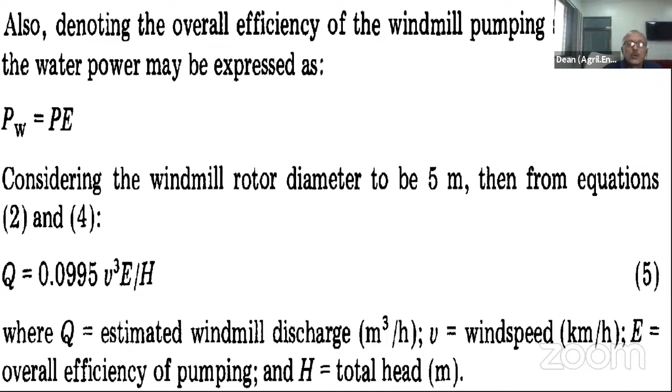Out of this equation, either Q or your efficiency, one parameter is to be fixed. Based on that, your velocity of wind as well as head of water, if known, the discharge can be calculated. Suppose you have 3, 4, 5, or 6 meter head, water table is there, and accordingly the wind speed is available at 24-hour speed, and total heads are known. Based on that, estimated volume can be calculated.

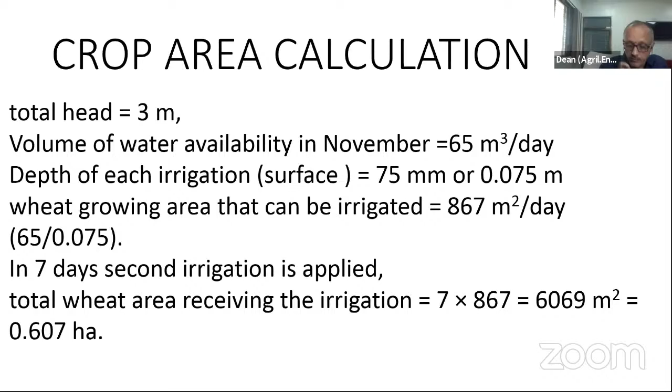This is a case of irrigation scheduling. If total head is 3 meters, volume of water availability is roughly 65 cubic meters per day, say in November where pre-sowing irrigation occurs. Depth of irrigation in surface irrigation, 75 mm is the minimum value, but it's not necessary to go for 75 mm, you can go for 60 mm too. So total amount of water divided by amount of water per irrigation gives total area in a day, and irrigation interval multiplied by that gives total area that can be taken for a particular crop. If you take the 24-hour average, your area can be enhanced.

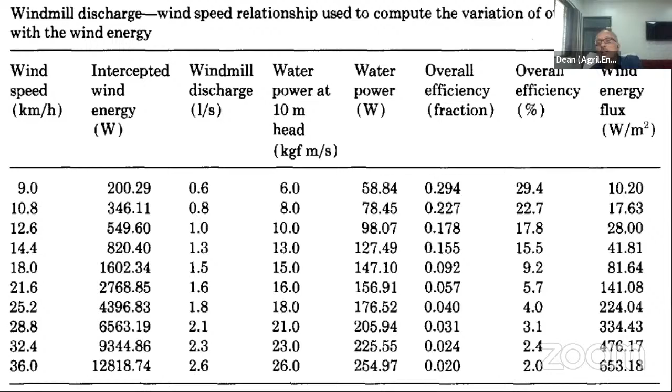Now if you want the same design in a probability way, here the wind speed is given, intercepted wind energy, the discharge is known, then water power head is calculated, water power is coming. So overall efficiency of the system is nothing but water power divided by wind energy, that gives you overall efficiency and the energy flux.

I'm saying you use the wind probability Weibull distribution of 2 parameters. Even for frequency intervals, you can find out what will be the probability of those values, and accordingly you can use that. Now you have the wind speed availability.

Now I want the reservoir capacity for storing that water, and what should be the minimum cost of it, and at what probability level. Suppose a person comes and says, sir, I don't want any risk - so you can categorize based on economy: risk aversive, risk neutral, and risk bearing type. Based on type of farmer, you design, and accordingly risk variation can be taken, and you use utility function to decide your probability level also. That can be utilized in optimization.

So here, what case was done by us - we have taken different risk levels: 50%, 70%, 90%, 100% risk level, and demand was varied. Demand was calculated, I'll explain how. 5 demand levels were taken, 4 probability levels were taken - roughly 20 possible combinations, 5 into 4. 4 risk levels, 5 demand levels, that means 20 combinations were taken. Based on that, the total cost was taken, and minimum total cost was used as criteria for deciding the optimum size of the auxiliary storage system, particularly for irrigation in windmill systems.

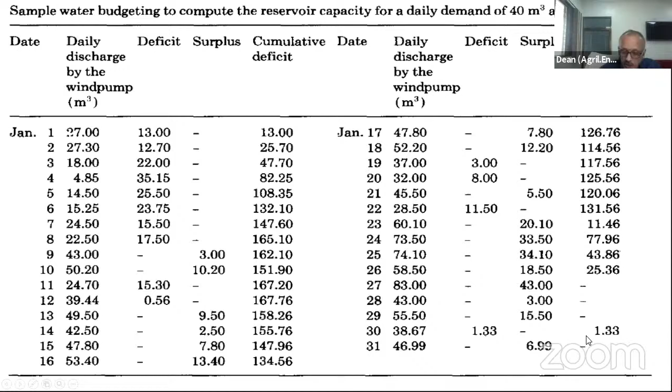So if demand is known, suppose I am taking 40 cubic meter demand. I will take 70% probability level, which can be taken by anybody else. The daily discharge available during different dates in January was taken. So 40 cubic meter reservoir capacity was taken, and this is the availability. What is the deficit that was calculated? So you find out for all these cases, for different daily demands, for different risk levels.

So the reservoir capacity can be plotted accordingly, and based on that, the reservoir capacity is known. You have the capital cost of construction and excavation cost, which is the investment on the windmill, and another on the reservoir system. You have to couple both, bring that to the annual cost of the system, and that annual cost will be added with the operation and maintenance cost accordingly.

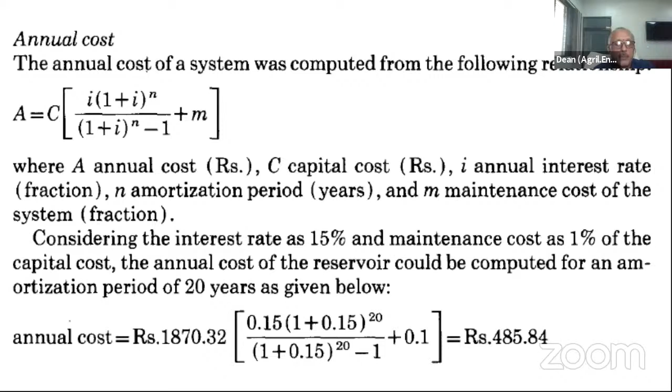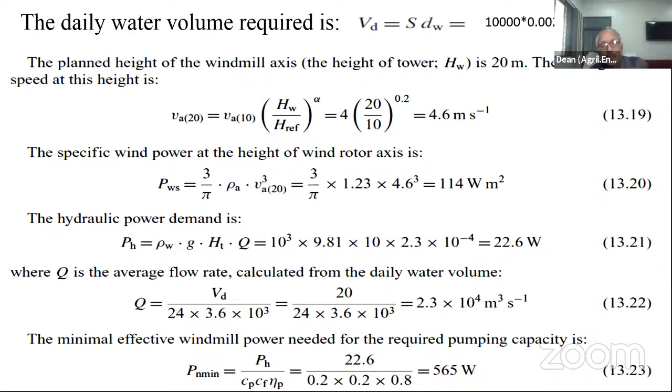Now this is one way. Accordingly, I have given case studies, particularly for daily, if a reservoir is for a fish pond, how much amount, say 20 cubic meters per day, is given. If you know the alpha Hellmann's exponent, which you can assume either 0.1 or 1/7 or any value, based on that your power from the wind, hydraulic power can be calculated, discharge in cubic meters per second can be taken, and based on that the effective windmill rotor area and diameter of the rotor can be estimated.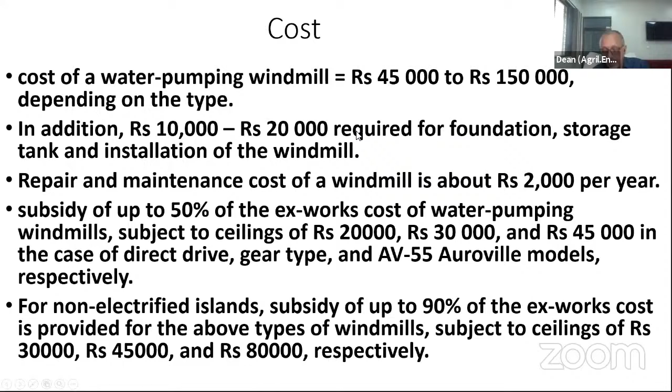Now, particularly government subsidies, you have 45,000 to 1,50,000 rupees. In addition, for foundations they will give 10,000 to 20,000 for tank installation foundations. Repair and maintenance cost given is 2,000 to 3,000 rupees. Subsidy is 50% ex-works on water pumping, subjected to ceilings of 20,000 to 30,000. And for direct drive and such, even 45,000 is given. For non-electrified islands, it is higher. This is totally the subsidy schemes that are being given.

And if it is a hybrid system, wind-solar hybrid systems, then the cost given is 2.5 lakhs to 3.5 lakhs per kilowatt hour, depending on the ratio of wind and solar components. Cost of installation civil works, 10,000 per kilowatt hour of subsidy is given from the government. Repair and maintenance cost, 3,000 rupees per kilowatt hour per annum is given. And for R&D works, either 50% or a maximum ceiling of 1.25 lakhs per kilowatt hour is given. For non-electrified areas or where power is not available, the subsidy is enhanced.

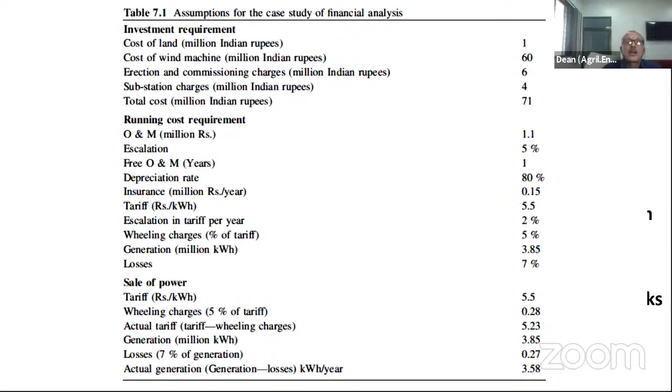So these are the depreciation values that are being given. You can take these for maintenance cost requirement and annual maintenance cost.

One important analysis I am giving here: there are two cases. Suppose you have 3 lakhs of amount. Based on that, what should be my power efficiency, or what should the capacity factor value be? Or if you have the capacity factor, what should be the optimum money to invest? In both cases, we have given a formula: if money is available, how capacity factor is calculated, and if capacity factor value is given, how maximum investment can be made. Based on this, you can also find out the internal rate of returns.

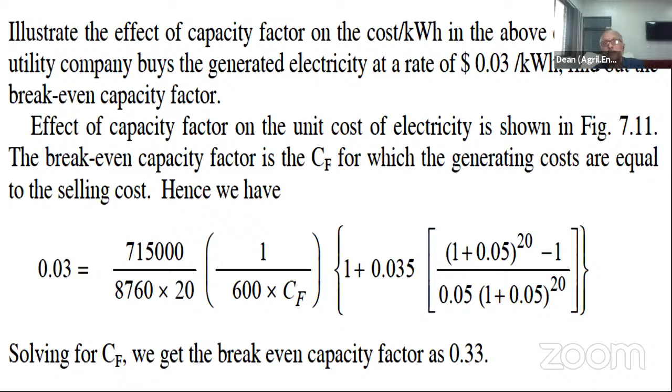But if you see the comparison, solar costs 21 to 81 cents per kilowatt hour, whereas wind is only 4 to 7 cents. But the initial cost is much higher for wind. Also, land requirement is a very important concern particularly for wind, which is why the government is working on this.

Then the main concern: it is not necessary to have high wind energy density at all places, so we have to find suitable sites. A minimum of 15 kilometers per hour wind speed is needed for economically viable systems. Low energy density is one of the criteria.

These systems require energy storage, which causes environmental pollution. Turbine rotors extract only 10 to 40% of available power, and as I've told you, the Betz limit means you can't go beyond 16 by 27 of the available power. High initial investments and irregular wind speeds are other concerns.

Because of irregular wind speeds, and since power is directly proportional to the cube of velocity, you get an irregular output power with a linear increase in weight and size. Huge quantities of concrete and foundation are required, and too strong winds can damage the system. So this is my concern.

So I have explained to you the cost considerations in systems with and without auxiliary reservoir systems, how to match the area, how to design wind rotor systems and hydraulic systems, what the components are, government subsidies, and all the economic feasibility aspects I have tried to focus on here.

Thank you very much for patiently hearing me for such a long time. I am also thankful to our speakers, Surinder Singh Saab, Dr. Mohod, and Dr. Sachin Kumar, who readily accepted to give their expert opinions particularly on solar and wind power. I am basically a man of soil water engineering, not a man of energy, but out of interest I am working on solar water pumping and wind energy pumping systems, and how to couple wind energy pumping with drip irrigation and low energy drip irrigation systems. That is what we wanted to do. Thank you very much.

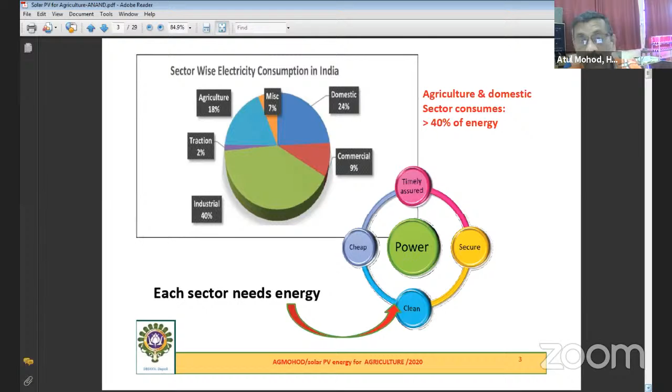Particularly, agriculture and the related domestic sector consumes more than 40% of energy in India. Now if we look at power generation, the huge data shown earlier, but the peculiar characteristic is that more than 60% of energy generated in India is fossil fuel driven—that may be coal, hydro, some part nuclear, natural gas or diesel—and it creates huge potential problems.

It causes climate change. What we observe is a cold wave, heavy rainfall, cloud bursting, etc. Particularly, these fossil fuel power plants are centralized power plants, which cause transmission and distribution losses to the tune of around 35%. This is the countable loss; there is also an uncountable transmission and distribution loss that we don't know the figure of.

There is a need for reliable action in the near future to fulfill our demand, as there is a limited time period left for the different types of fossil fuels—that may be coal, natural gas, or crude.

Hydropower has around 84,000 megawatts of capacity. The period left for it is infinite, but still there is a conflict over whether the water should go for irrigation, drinking, industrial purpose, or power generation and redistribution. Nuclear power also has infinite capacity, but there is a security concern with that source as well.

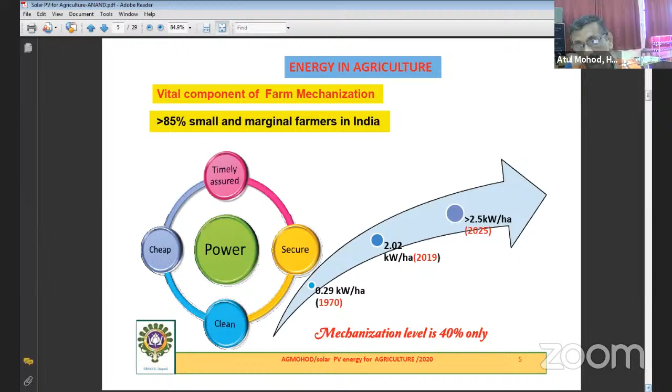For this purpose, we require secure, clean, cheap, and most importantly, timely assured energy particularly for the agriculture sector.

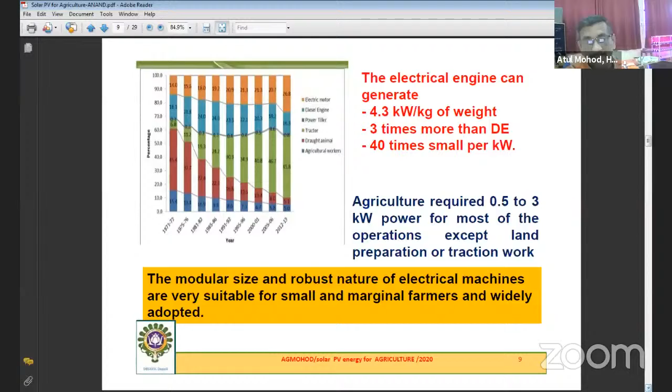Naturally, most of the data presented by Dr. Subbaiah has already shown the DISCOMs everywhere - not just in Gujarat or Maharashtra, but all over the country - each and every electricity distribution company is under much economic threat. If we require the electricity from the farm, we need 7 times more than the present figure. Whatever electricity we are consuming now, if we change to electricity, we require 7 times more.

Our problem is around 69% of our electricity is generated from fossil fuel, which results in huge transmission and distribution losses.

On average, there is an 11% shortfall of electricity supply observed, and the farming sector consumes around 18% of the electricity while contributing only 5% of the GDP of the nation. This gives rise to other sectors like industrial or transportation constantly questioning the government about why they are giving free subsidy or free power to the agriculture sector, since it doesn't contribute much to GDP growth.

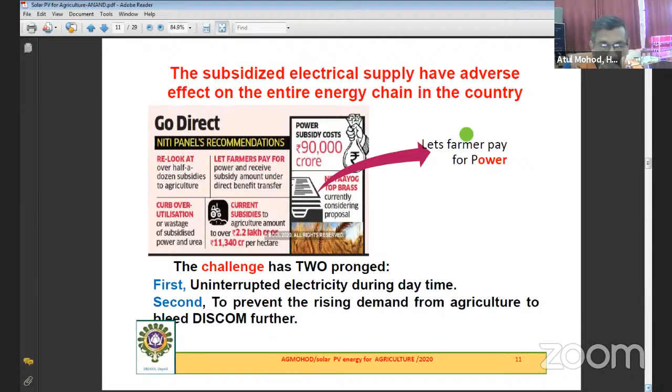We cannot put maximum pressure on the DISCOM, as it is on the verge of collapse, and for that purpose we require another option. Now coming to the topic, given this situation, we have an ultimate solution.

We are fortunate that India is blessed with the sun. Solar energy in India, even just 10% of the total energy received by India, if used, having an average of 1.3 kilowatt per square meter, even 10% of it used can solve our problem forever.

It is clean and pollution free. It can be decentralized in nature. It is almost available 300 days in a year. There is no distribution and transmission loss if we install a solar power plant. Cost is competitive with other sources. It is scalable, most importantly from few watts to megawatts, and it has a very low gestation period.

If I want to install a coal-based power plant, there is rehabilitation of people, a threat to the climate, and nature damage. Instead, a solar PV power plant has a very low gestation period without rehabilitation, without harming nature, and no displacement of people. Most importantly, it has huge potential for the empowerment of rural youth and local people.

So this is the source we ultimately have to use for this purpose.

Solar energy has major applications, either thermal or electricity generation. For temperature, it may be low, medium, or high temperature. I am not going into detail about the different applications of solar thermal technology. Whereas for electricity, it can either be a standalone system with DC or AC power, or a centralized power system. Solar PV can be classified majorly into two sectors.

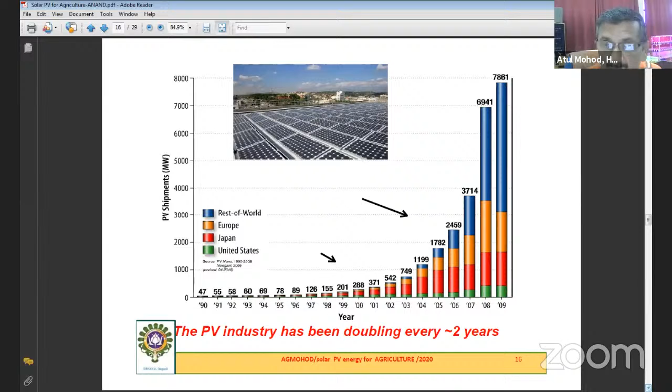For students or for the agriculture sector, particularly agriculture engineering, this is one sector where the integration of the solar photovoltaic system for agriculture purposes is very much needed, because this is an industry doubling every two years in a huge manner all over the world.

Now, one concern is to reduce the cost and increase the efficiency. There is an upfront cost, and research and development of the solar photovoltaic system worldwide is working on three components: one is the semiconductor material, related to chemical engineering or electronic systems; second is area related cost, that is reduction in cost of glass, installation, real estate, and wiring; and third is power related cost, that is the inverter.

There are two strategies for reducing the cost: reduce the semiconductor material. Nowadays you can observe solar panels reducing in size day by day, but the efficiency keeps increasing, and reduce the area by increasing the efficiency. This is the way we can reduce the cost of the solar photovoltaic panel.

The second approach is two primary concentrating approaches: increasing the concentration or the solar intensity by concentrating solar radiation on a smaller area. So there's high concentration and low concentration area, which increases the input over the panel. Cost of the panel is reduced by size as well as by increasing concentration. In this way, people are trying to reduce both the cost and improve efficiency of the solar photovoltaic system further, for wider adaptability.

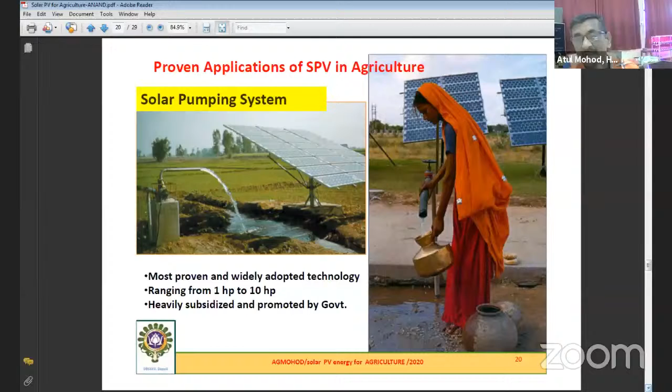There may be a conflict between the system integration and the selection by the farmer, but it is a proven technology that can be used for micro irrigation and sprinkler irrigation, and can be adopted widely by farmers. It is the most proven and widely adopted technology in rural areas, ranging from 1 HP to 10 HP, even up to 15 HP, and is heavily subsidized and promoted by the Government of India.

One more technology for small and marginal farmers is the solar PV operated sprayer. A huge amount of manual or fuel energy is required for plant protection appliances, and solar photovoltaic based spraying systems, on average around 16 types of sprayers, are already in the commercial market. This is a proven technology that solar PV can be used for plant protection appliances. This is the second technology in my view.

The third one is solar fencing for protection from wild animals. This is the biggest threat nowadays for horticulture crops as well as commercial crops grown by farmers, which are high value products, and the threat from wild animals is very high. Fencing with solar is one solution for this, and it is now widely adopted. It is totally operated on solar power, there is no threat to the animal, but it will protect your farm from wild animals. It has a low operating cost and can be widely adopted. This is the third field operation where solar photovoltaic can be used.

One more technology coming into the picture nowadays in cold chain marketing is the solar photovoltaic based cold storage unit. This is also a direct application of solar photovoltaic. It is a transportable unit with a capacity of 5 tons and above, maintaining a temperature of around 2 to 4 degrees centigrade, providing 24/7 cold storage facility for vegetable and fruit growers. There is a need for wide adoption of this technology so that we can increase the share of solar photovoltaic energy in the farm, so farmers may not need to rely on the DISCOM or government for uninterrupted, secure, or cheaper power supply.

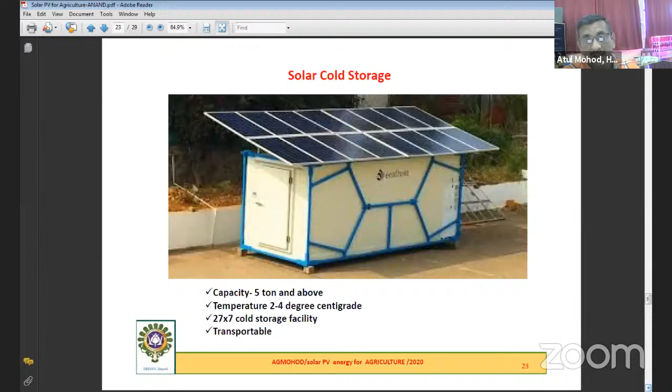So these are the 4 technologies looking very prominent for agriculture at this moment where solar photovoltaic can be used. If we look at the overall photovoltaic system, instead of a few large power plants, we can go for mini solar power production along with wind power also, in a hybrid system.

Second, the market of the existing power plant is centralized and mostly national, whereas solar energy has the potential to be decentralized, ignoring boundaries, and it creates a chain or grid of power plants at the decentralized level.

The third major component of power is transmission. The existing transmission system is based on large power lines and pipelines for petroleum products as well as electricity, whereas solar power has the potential for small scale transmission and regional supply compensation, which will reduce transmission and distribution losses.

The fourth point is that existing fossil fuel power plants generate power from top to bottom, created somewhere else and flowing from the top level down to the bottom level. Whereas in a solar photovoltaic based power plant, it works from bottom to top as well as top to bottom, by using rooftop solar systems or net metering. From the bottom, you can generate electricity and send it to the top of the management, and from the top, whenever required, you can get it to the end user applications.

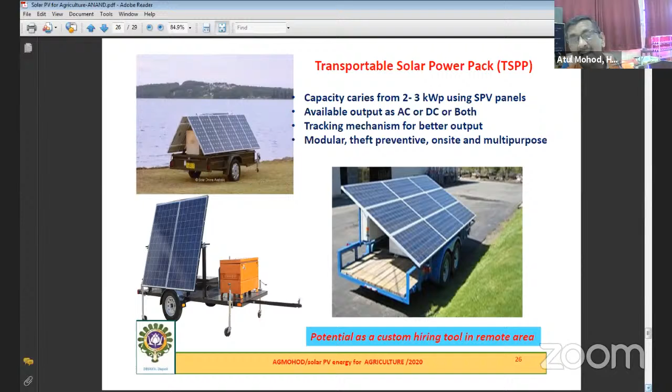This is the second technology I'm observing in solar photovoltaics: community solar photovoltaic based agri feeder, and second is the transportable solar power pack, just like a tractor, like custom hiring. The third technology coming into the picture is the solar agri production system, or simply called agro-photovoltaic.

That is the combination of photo-electricity and agriculture production on the same land. There is no extra land required for this. 30 to 35 area of land cover will produce sufficient power to manage the rest of the things on the farm. Extra power can be stored or supplied to the feeder using the net metering system for further gain.

In my view, in the next decade these three technologies will create a different picture in Indian agriculture: community power sector, community feeder or power plant by the DISCOM for energizing nearby farms; second, the individual power pack of around 2 to 3 kilowatt maximum, which is transportable in nature; and third, the solar agro-photovoltaic system, which can generate power from the same land, and that power can be used for managing different operations.